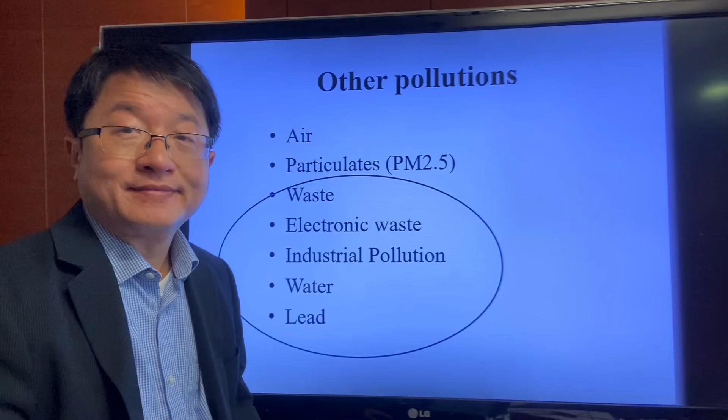Apart from air pollution, waste pollution is also very important. Because of the economic growth, now people are more wealthy and they can buy more goods, and then there will be more waste. After they finish using, say, the mobile phone, in the past they may change the mobile phone maybe every 3 or 4 years, but now they change it every year. So there's a lot of waste generated.

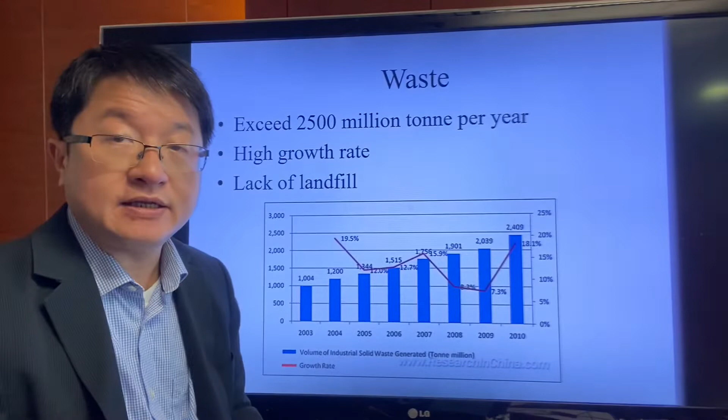So this is the structure of a landfill. It's not difficult to build a landfill. We first dig a hole and then cover it with a clay liner, which is a waterproof material that can avoid the dirty water from the rubbish getting into the underground water. And then we can start throwing rubbish into this landfill, and the rubbish will then accumulate. Maybe a landfill can last for a few years or a decade.

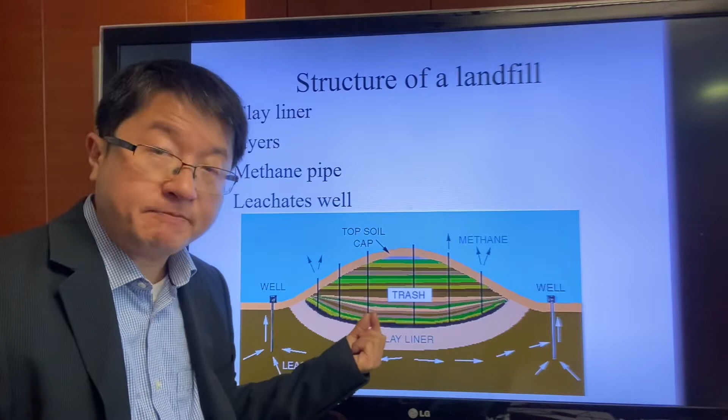And then when it is full, we cover it with a topsoil cap so that it will not expose the rubbish to the air. After a period of time, the organic substance in the rubbish will degrade and create some gases, and these gases are methane gases, which are quite useful because we can burn methane gas to generate power. So we will also put some pipes to collect this methane gas generated from the landfill for energy saving. And this biodegradation process requires air ventilation to facilitate the aerobic respiration of the bacteria.

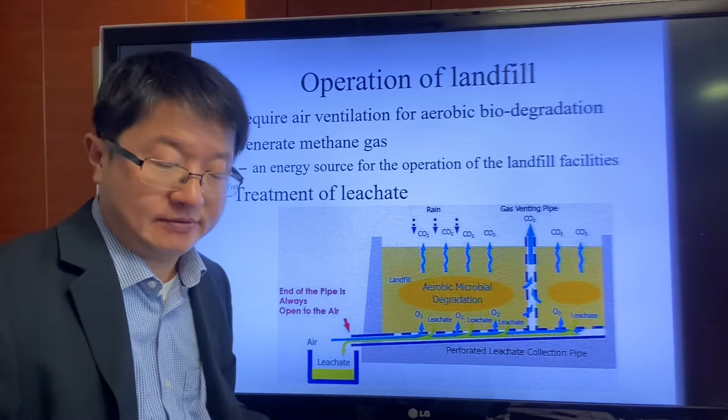So in the operation of the landfill, at the beginning, because there is air in the soil, the bacteria will undergo aerobic respiration, which means the respiration that consumes oxygen. Just like breathing, we breathe in oxygen and then breathe out carbon dioxide. So bacteria will also behave the same way. But carbon dioxide will increase in concentration. So this is phase 1, aerobic bacterial respiration.

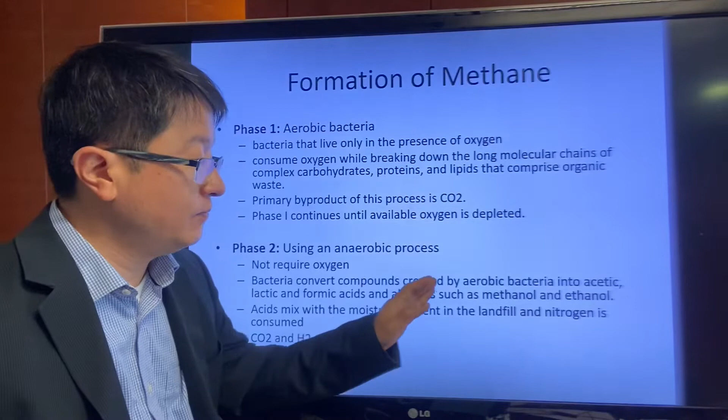In the presence of oxygen, the bacteria will breathe in oxygen, break down the hydrocarbon and then breathe out carbon dioxide until the time when oxygen is depleted, no more oxygen in the soil. Then it will go to phase 2, which we call the anaerobic process, meaning the process without using oxygen. So when there's no oxygen and the hydrocarbon is broken down, and when there's no nitrogen, the bacteria will convert those hydrocarbons into methanol and ethanol. And then later on, the gas methane will be produced.

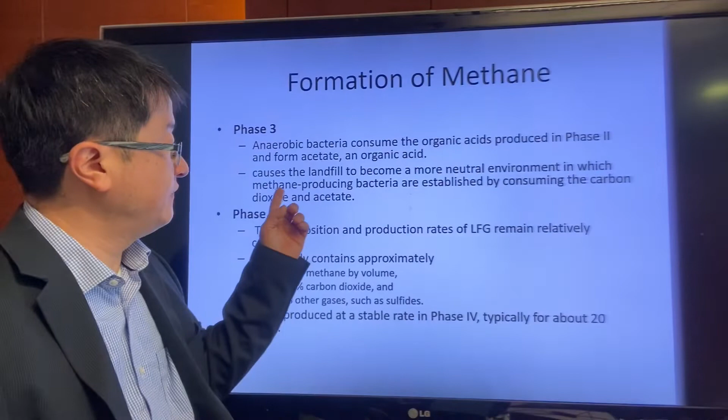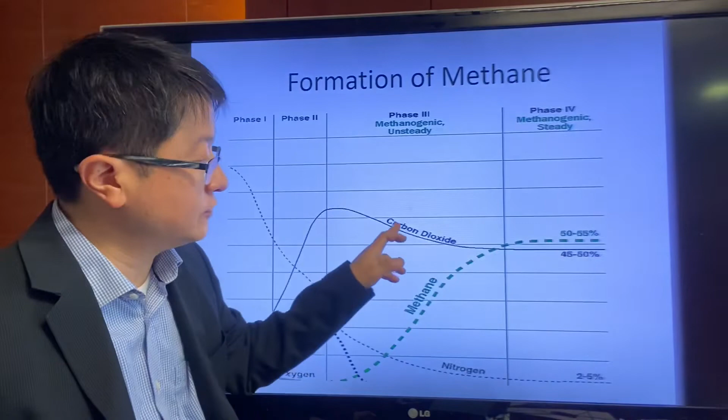And then in phase 3, those methane-producing bacteria will produce methane and also consume more carbon dioxide. So you can go back to the chart showing that in phase 3, this is what we call the methanogenic activities, and the carbon dioxide level will drop because the methane-producing bacteria will consume carbon dioxide and at the same time produce more methane. This is the typical operation of a landfill.

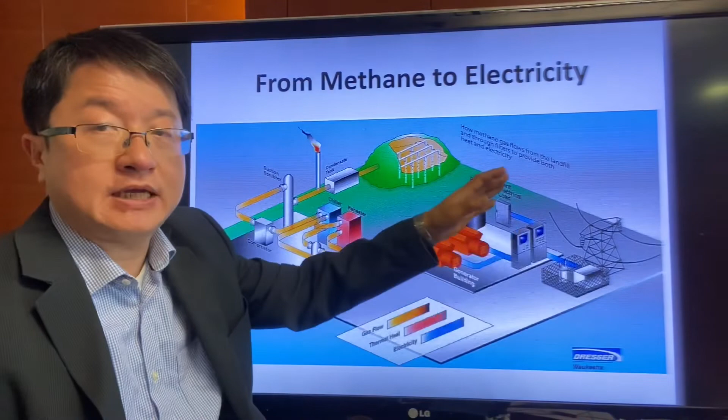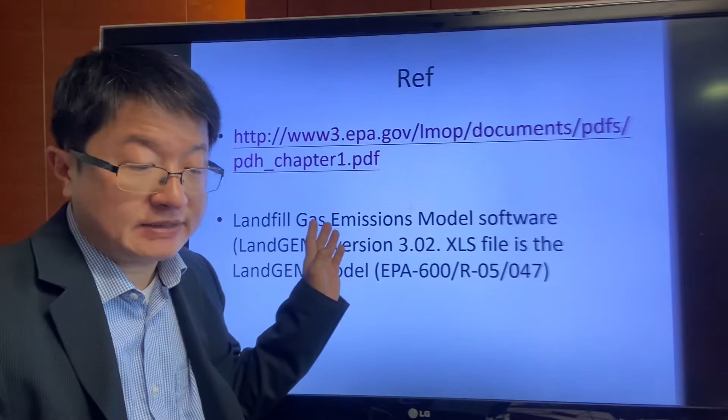So what amount of power can be generated by a landfill? Now let's see this example. You can go to this link and download this Excel file, which gives us the landfill gas emission model to help us do the calculations. So let's say the landfill can provide 432,000 cubic feet of landfill gas per day. And methane gas is an important component of the landfill gas, which can provide an energy content of about 34 megajoules per normal cubic meter.

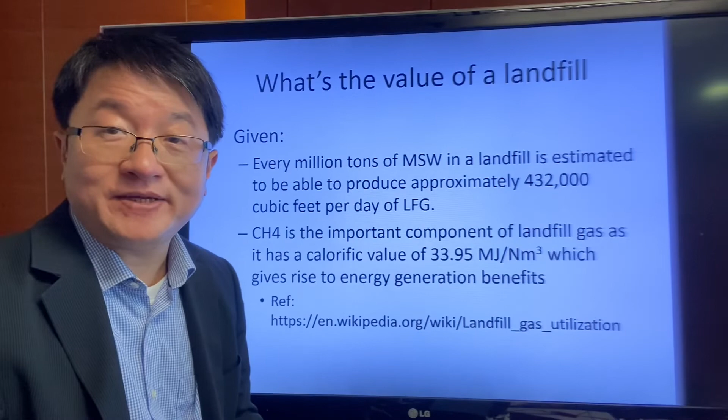Then please try to calculate the value of this landfill, how much energy it can generate, and the equivalent value of this amount of energy in terms of the electricity charge in Hong Kong. Let me give you a tip. In Hong Kong, we are paying about 1.3 Hong Kong dollars for each kilowatt-hour of energy. So please do the calculation now and give me the answer in the next online tutorial.

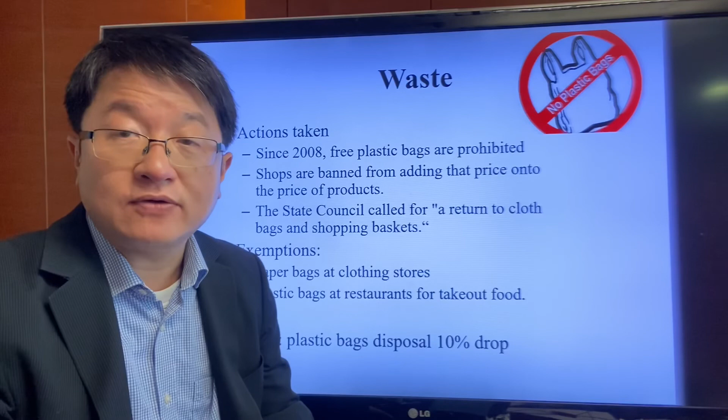Having said that the landfill can generate some good value to society, we still need to reduce the amount of waste. There are lots of actions taken by the government. For example, prohibiting the use of free plastic bags, and the State Council also promotes the use of cloth bags and shopping baskets. These measures helped achieve a 10% drop in the usage of plastic bags. But this is not enough. We need to work together to reduce the generation of waste and try to reuse and recycle our waste products as much as possible.